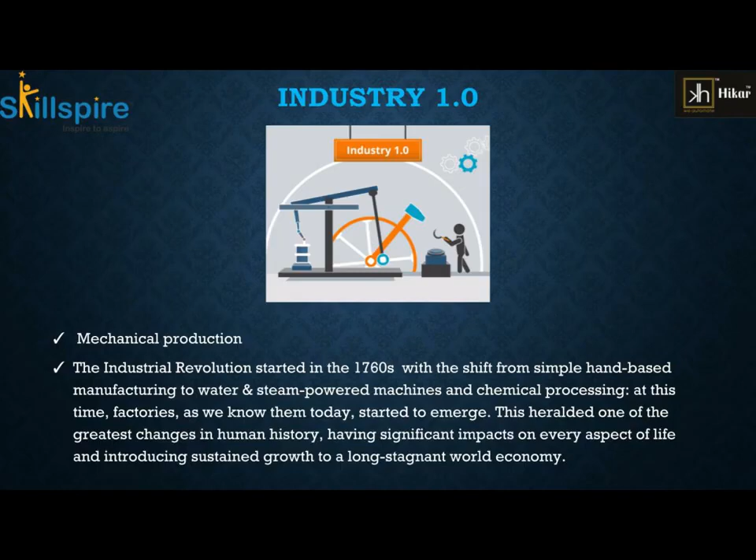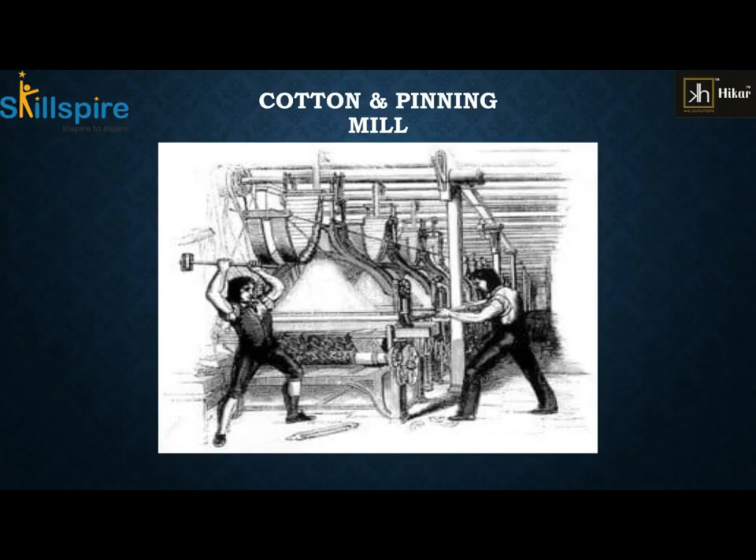Then it came to Industry 2.0. If you see, after 100 years - Industry 1.0 was in the 1760s, and this is the second evolution, in the 1860s. After 100 years, people came out with Industry 2.0. We can say the second big revolution of industries, where the assembly line came into the picture. People started knowing how, if we can make it one line of assembly, where a part is coming through the left, and we are doing something and we can send it further.

Okay, so operations are still manual, but yes, it is the assembly line. Parts are coming in the fast way, and they are able to manage mass production.

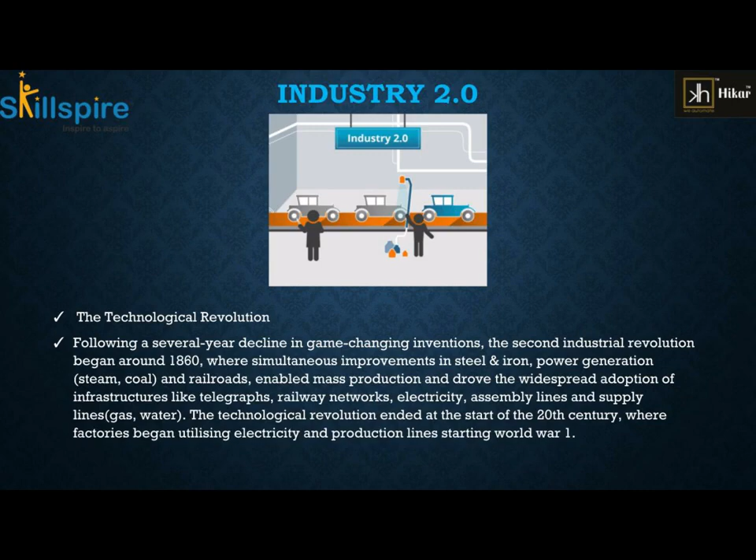So we were in the era of Industry 2.0, where electricity came into the picture, assembly line came into the picture. Everything now, part moving is automatic, but the fabrication, the processing on the part, is still manual. So this was Industry 2.0.

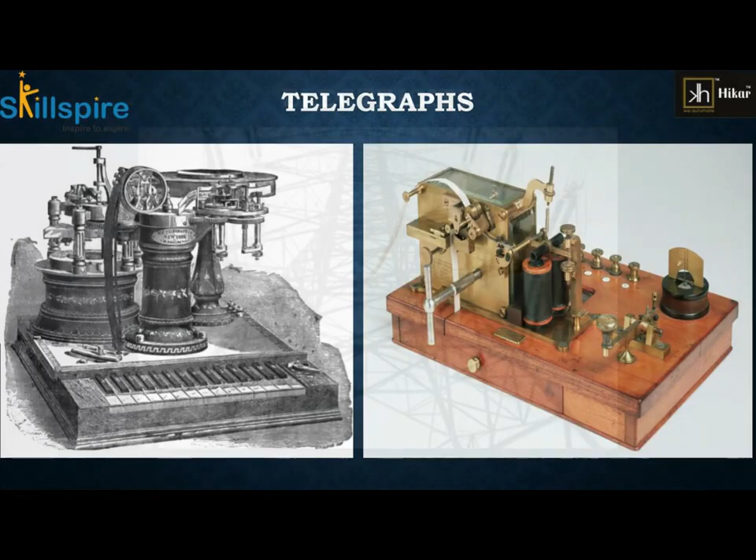All this is the result of Industry 2.0: telegraphs. Electricity was the main parameter, the revolution of 2.0.

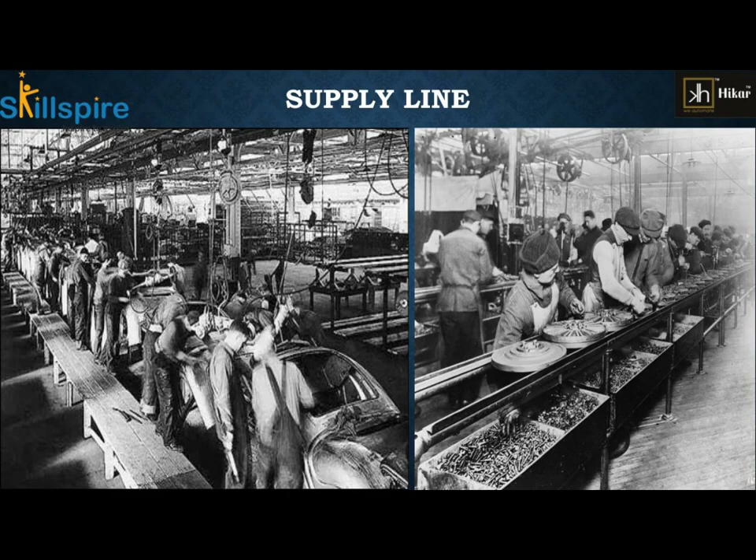After this, around 1950 or 1960s, this revolution came, Industry 3.0. So again you see the gap is 100 years. In the first revolution, 1750-60, the second in 1850-60, and the third in 1950. So the gap is 100 years. After 100 years again, in 1950, Industry 3.0 came.

Why did this revolution happen? Electricity was founded during Industry 2.0. Now in 3.0, along with electricity, people came to know about electronic circuits. This was the era of electronic circuits.

This byproduct of Industry 3.0 is currently used in current industries as well. We can say microprocessor, microcontroller, PLC, DCS, SCADA - all these components are part of Industry 3.0, where the process is automatic based on the logic you are writing into your circuit board, your PLC, your DCS.

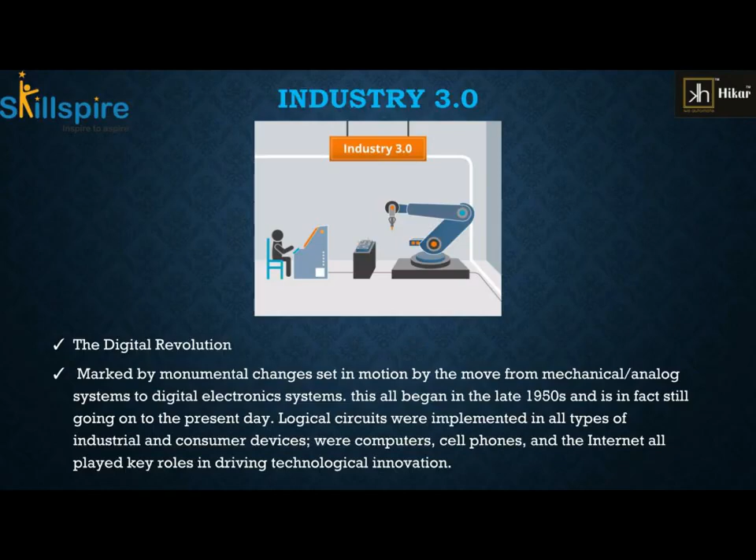So we can say automation started from Industry 3.0, where the process really becomes automated. One manpower is required to operate the machine, and the machine can process in a fully automated way. What was the main component? We can see in the next slide.

This was the mechanical era. We can say the difference between Industry 2.0 and 3.0, 4.0. It was mechanical, and right now people are communicating with machines through communication, through laptop, and making it fully automatic. The machines are working based on pre-programmed logic. So this was the era of 3.0.

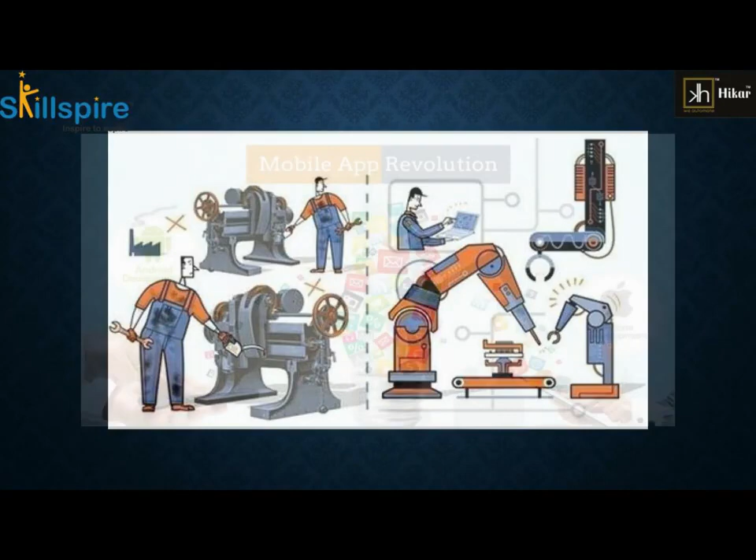The mobile application revolution also started in the era of 3.0, after the 90s.

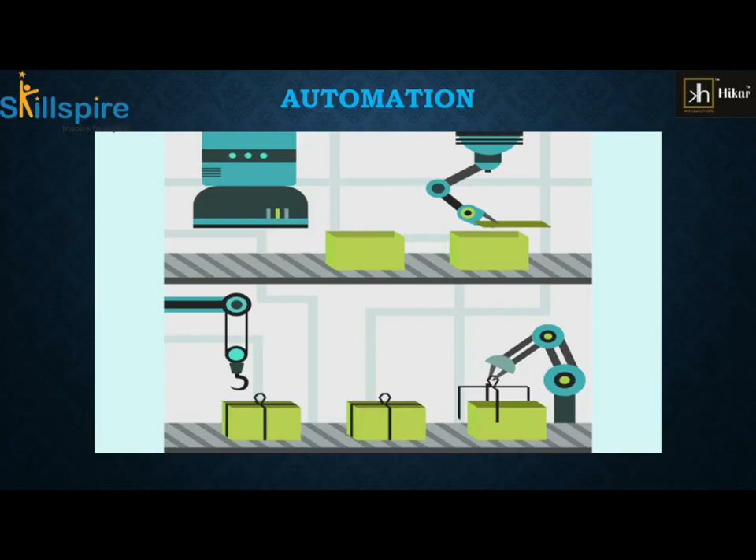So you can see the automation - automation first came in the 3.0 era. Based on the program, the machines are working automatically without the intervention of the human, without human intervention. So this was 3.0.

The third revolution, as I told you, involved microprocessor controller, PLC and DCS. So we are still in the era of 3.0, where many factories are running on 3.0.

This was the main component of 3.0: computation. Computation came into the picture. Before that, in Industry 2.0, the only driven force was electricity. We got electricity, people started managing the assembly lines - electricity managed everything.

But in 3.0, computation came into the picture. People started doing computation, logic, programs, and based on that written program, machines are working. For those who had never seen this, it was like magic - we are writing something and machines are working accordingly. So computation was the main component of 3.0.

Automation came into the picture. Along with computation, they merged automation, so machines and processes are now working automatically.

And third, very important, was communication, which is also part of the revolution of 4.0 that we'll come to later. Communication plays a major role in every revolution. In 3.0, people are communicating with machines through computers. As many of you are studying PLC, controllers and processors, you know how we communicate through computer to the chip, based on some communication protocols. This plays a major role in the revolution of 3.0. So this was the era of 3.0.

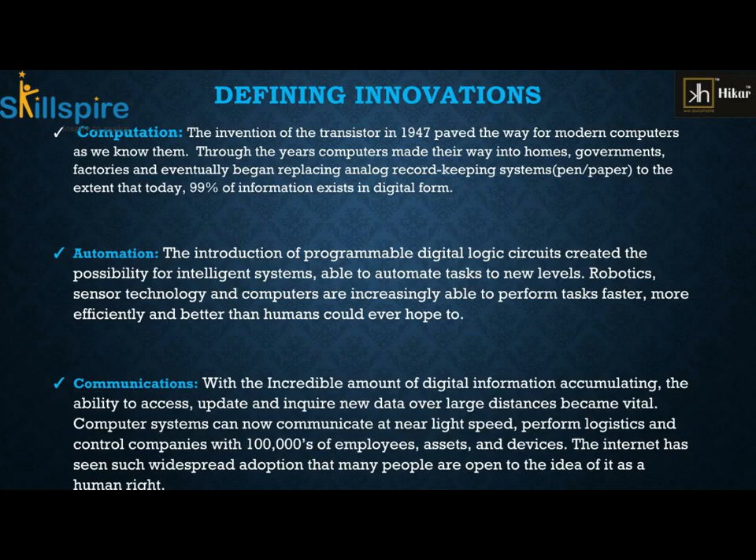And then we are coming to Industry 4.0, which we can say is the most latest. Right now this is the emerging, and not only the present, but this is the present as well as the future of any process industries. This happened around 2000 or around 2005.

Now if you will see, this is very interesting. If you see the eras, the first was in 1760, the second was in 1800s, the third was in 1900s. So 100 years gap in between. But if you see the fourth revolution, it is just 50 years. So it didn't take 100 years to revolutionize the industry one more time. So this is 4.0, and you guys will be the future, and I'm sure it will not take again 50 years to revolutionize one more time, and Industry 5.0 will come.

So this took only 50 years to bring the revolution in industry. And this is the fourth revolution, that is why it's called 4.0.

One more thing connected with Industry 4.0. Now the question will come to your mind, what is new in 4.0? Because as you know, in 1.0 it was totally mechanical, 2.0 brought electricity and the assembly line, 3.0 brought PLC, SCADA, computation came, automation came. Now what is 4.0? I mean, what new came to the industry which makes it 4.0?

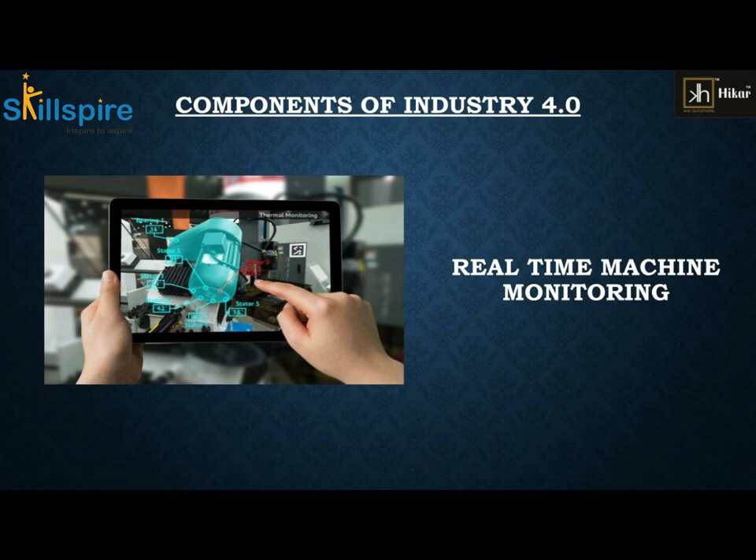One question from Rutu - will it take 100 years for transition from 3.0 to 4.0? No, it will not take another 100 years. As I told you, it went from 3.0 to 4.0 - it took only 50 years for this 4.0 revolution. So the upcoming revolution will not take this much time, that is for sure. And yes, this is the real-time machine monitoring which 4.0 brings to us.

One more major component of Industry 4.0 is predictive maintenance. Now guys, this is going to be more interesting. See, what 4.0 brings to us is monitoring - online monitoring, controlling from your mobile. Now it is going one step ahead - not only monitoring and controlling, but this will tell you the future of your machines. Isn't it interesting? Until now, whatever technologies came, none had the ability to tell the future of your machines or your factory. But 4.0 brings us that power, which will give you insights into the future of your machine.

As an example, since you're all from a technical background, we can go a little deeper technically. We'll take an example of one motor - a simple three-phase motor having some problem. If you don't have any technology 4.0 on it, what will happen if the motor fails?